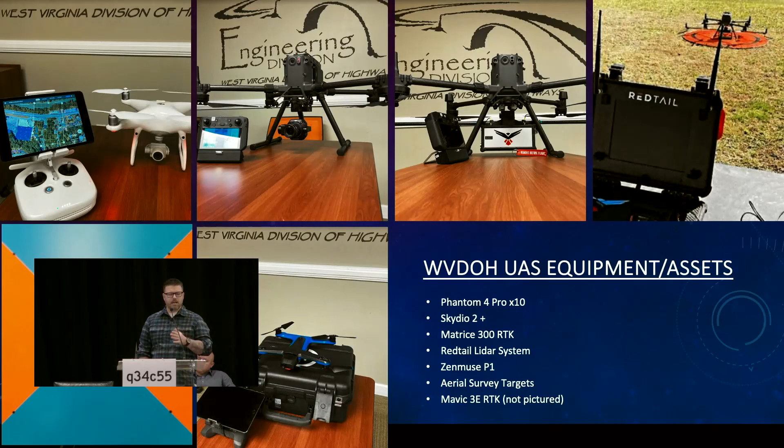And most of our pilots are surveyors first, so they know how to set a really accurate control network. They know how to set good GCPs. They understand absolute accuracy. They understand relative accuracy. So we don't have a lot of time, so I'll go ahead and turn it over to Daniel, our UAS manager.

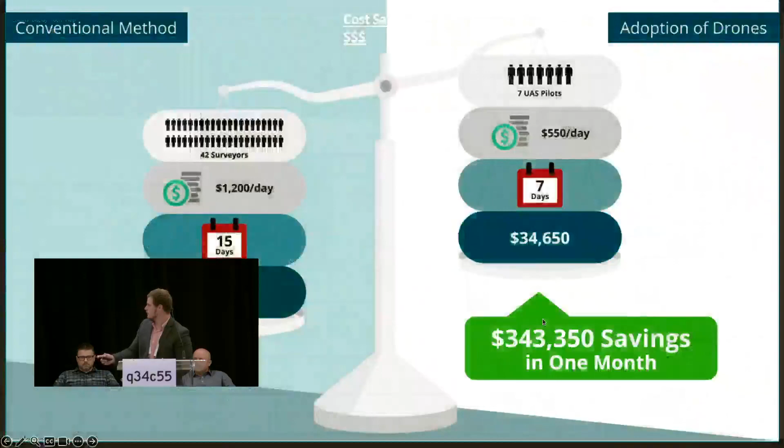Okay, can you play the video, please? Okay, so it was just a video basically showing how we do a volumetric analysis for our Class 11 stockpile. We have to go out yearly and capture all 177 sites. We were typically doing that conventionally. We moved to doing it with a drone 5 years ago. This was our ROI, so it was a huge deal. In 5 years, we're over $1.5 million in cost savings with an initial investment of less than $10,000.

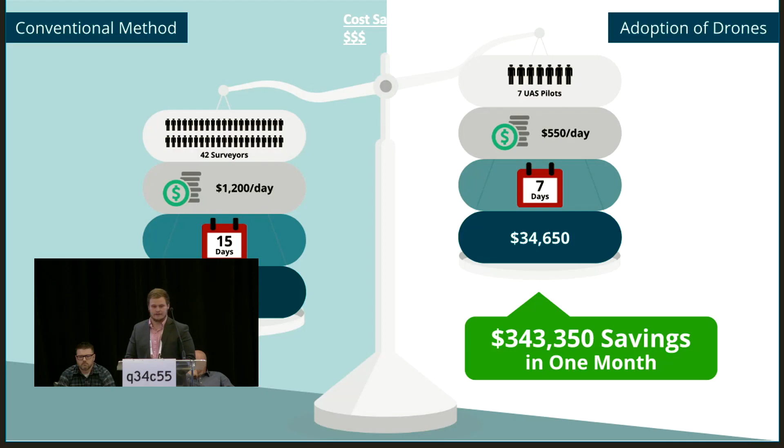So this was the ROI calculation that we did for this interstate mapping project. It's all there in the numbers. We saved $76,000 compared to what mobile LiDAR would have been. It was a huge deal. Travis had always told me that we would never be able to get pavement from a digital twin. I thought that wasn't the case, so I flew our M300 with a P1 sensor at a little under 200 feet, giving us a ground sample distance of about 0.3 of an inch. It worked out very, very well.

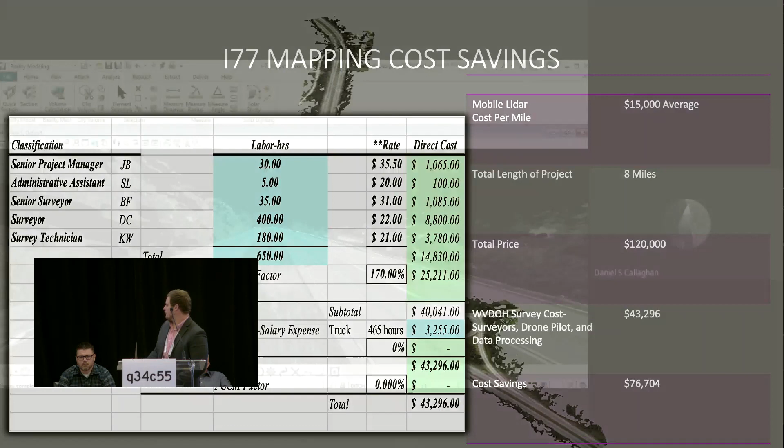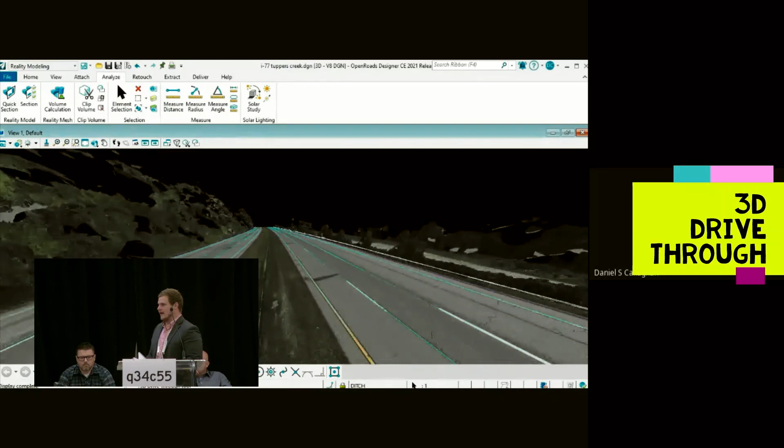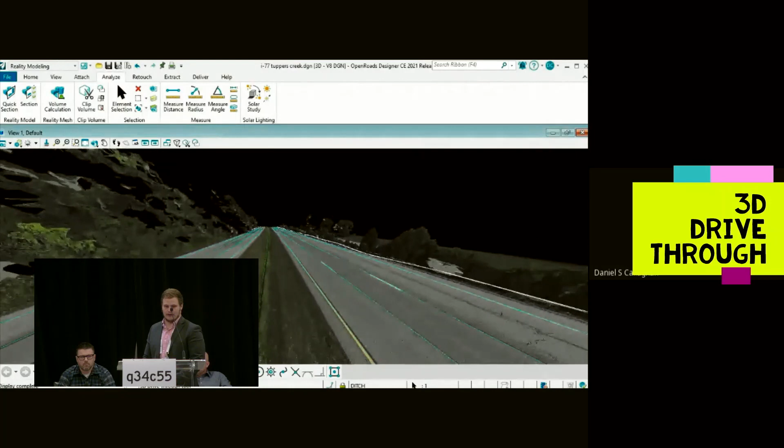So this is just going to be showing off basically how we did this processing. We didn't actually try to create a terrain from the digital twin. We actually went and created CAD line work and manually created all the features. So we're not trusting a surface that was created by a software. We treated it like you had a surveyor sitting in front of a computer getting all the shots. Worked out very, very well.

Some of the things that we learned with this was you really have to be careful where your guy is clicking the mouse. On a project this size, it is just so big, so going back through and quality checking things is very tough. You can see here the guardrail lines are kind of missing in places. He clicked inaccurately. It kind of sucked. We'd already turned it in. Not a huge deal. That's not usually a 3D design element. It just is where it is.

I didn't really know that this was possible. Whenever I approached Travis about it, I kind of trusted our people and the equipment. We've been doing this for a while. It worked very, very well.

Waiting for the video to progress here. Sorry, it's taking longer than I thought it would.

Okay, so this is showing a section of this. We broke it into 1 mile sections. It was just going to be too much data to process all in one swipe. Each mile was about 2,000 photos.

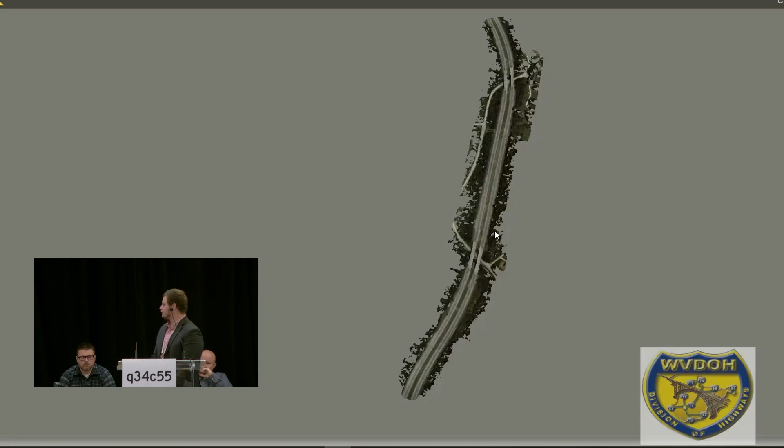So this has been a big deal for us. Once we capture a big reality data set like this interstate mapping project, what do we do to be able to share it? These file sizes are massive. So getting a designer to download this file from ProjectWise and then attach it was kind of a big ask. So being able to share things through ContextShare was a massive improvement for us.

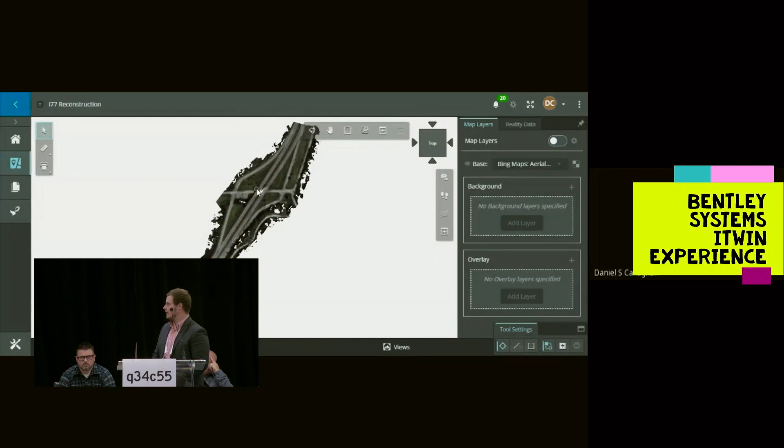Okay, so this is another section of that, loaded in Bentley's iTwin experience. This is web-based software. So I was honestly shocked at how well this worked. When Bentley first came to us with their cloud-based software, I was very skeptical. How can a browser handle this file size? And as you can see, it does it pretty well.

The way that they load their level of detail works very nicely. We're still looking for a great use case for putting them on the cloud. I don't know who is going to use this for now, but it's very neat. So I'm going to show here a measurement. The measurements are actually very nice too.

You can get all the measurement data from this, and you'll actually see that on the right side here. Not only do we have the distance, but we have the slope, we have the start and end point coordinates. It's very nice. It works very, very well.

The one thing that I wish Bentley would give us would be some more CAD tools inside of this so that we could get more people to use it. I think that there is a great use case for this though. And the process for uploading this here is the same process for uploading it to ContextShare, where it can be used and attached to models. So it makes it a pretty simple process.

And then this is one of the first bridge inspections that we did. We flew this with Phantom 4 RTK and Skydio 2. And then the blue lines are the AI crack detection that was performed by the iTwin experience on the cloud. So we didn't run this on a local machine. It did this for us, and it's pretty slick that you can actually output a CSV of all of these cracks.

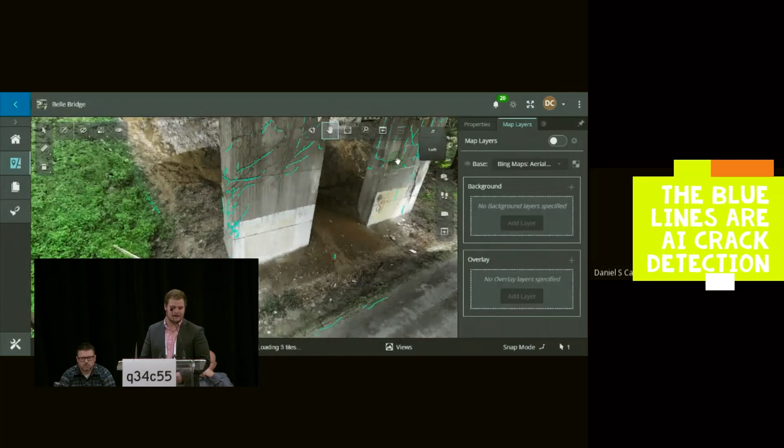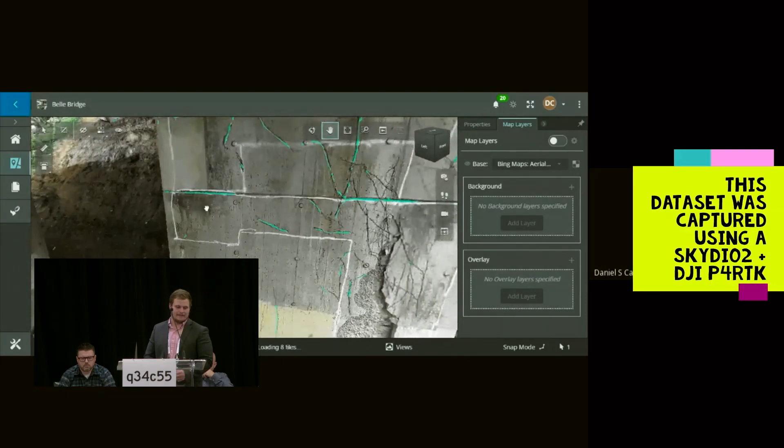With conventional methods, basically, the only way that we're going to get the top of this pier, that you'll see in a second, is with a terrestrial scanner. It's typically how we would have done it. But even with a terrestrial scanner, how do you get set up to where you can see the top of this pier? It's kind of impossible. So this gave us a way that we were able to do it.

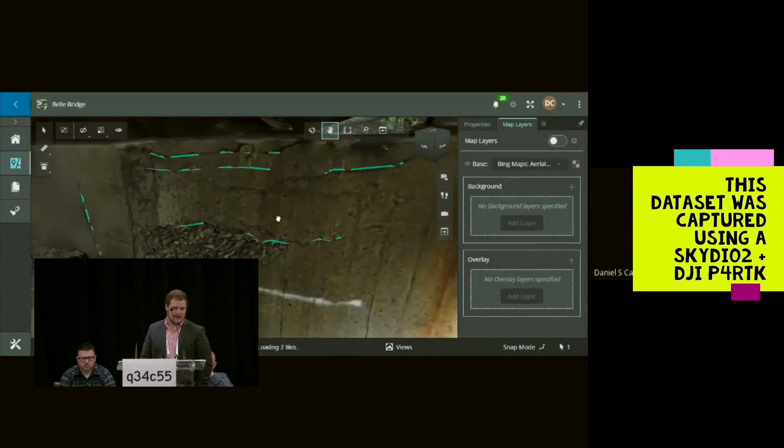They were actually performing an inspection, so you'll see they've outlined some of the delamination areas. Worked very, very well. You can actually see there's places that don't look as well as others, and that is because the ground sample distance in those areas wasn't as great. Part of that would be Skydio. We were just learning how to use it, and there were some setting issues here.

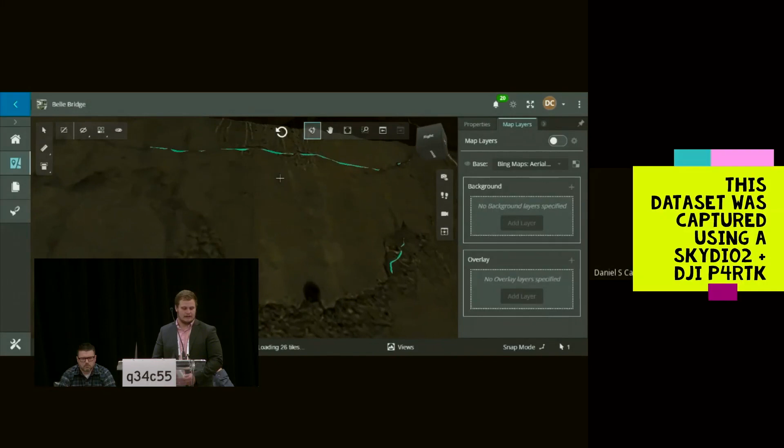So you can see, like on the crack, it definitely got a bunch more photos. We got a bunch more data. But then to the left side of the screen, it looks kind of blurry. We just didn't capture it very well. We learned a lot of lessons on this one.

So they'll set the ground control, the pilot will come out and fly it, we process it, and then we take the model to the already created CAD drawing that we created with the survey data, and then, like I mentioned a minute ago, we just add the features from the model. So we're not trusting software to give us a surface. We just create the surface on our own by adding elements to the drawing.

So this was a project that we did kind of early on with the drone. All of the structures here were created from the drone flight. So we had, I think it was 115, yeah, 115 structures. If we had to do this conventionally, we would have been here for a long time. Every house had a fence.

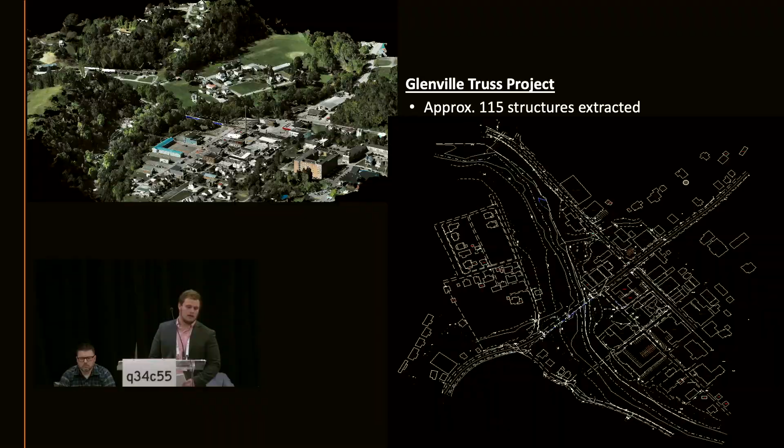I mean, it wasn't the nicest neighborhood. It would have been tough to go in the backyard of every one of these houses. We would have been there for a very, very long time. It made this project go from 5 to 6 weeks to we had it done in 1 week, a deliverable ready to go.

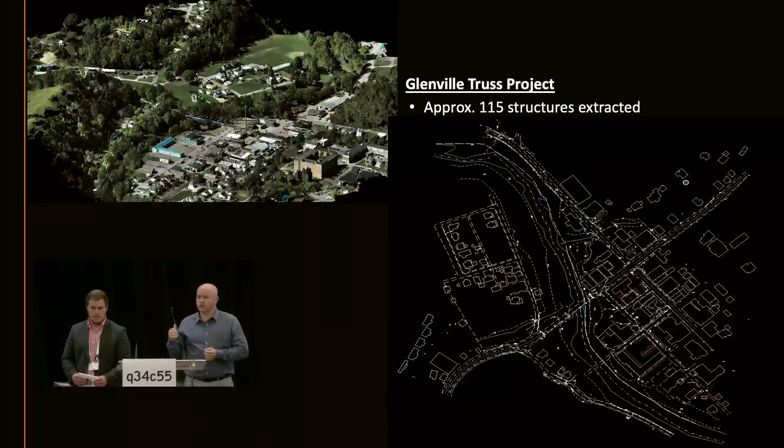If you jump back 10 years, when we first looked into digital twins in like 2012, they were GIS at best. 3 foot vertical accuracies, horizontal; they make really good mosaics. Okay, great, but that's not survey grade. Now look where we are today. If I fast forward 5 years from now, it's going to scare people. This might even do away with some instances where we need mobile LiDAR. We'll be able to do this, and that'll really change our industry.

The other thing to add is that redundancy is not always calculated in surveying when it comes to accuracy. But the redundancy that we find when you have that many shots, you would never collect that many shots typically. And the other good thing about this one is that it has a lot of that differential in the pixels because the road is terrible. So that really helps. You got all those cracks and all those patches.

But when it's modeling thicknesses of something that's been painted about 17 times, I know that's millimeters, but we are modeling the paint stripes. We're getting to that level with digital twins. And to plug one of these out here, this Phase One, something that has 100 megapixels, you're going to see that kind of accuracy. And then controlling it with good ground control. See it.